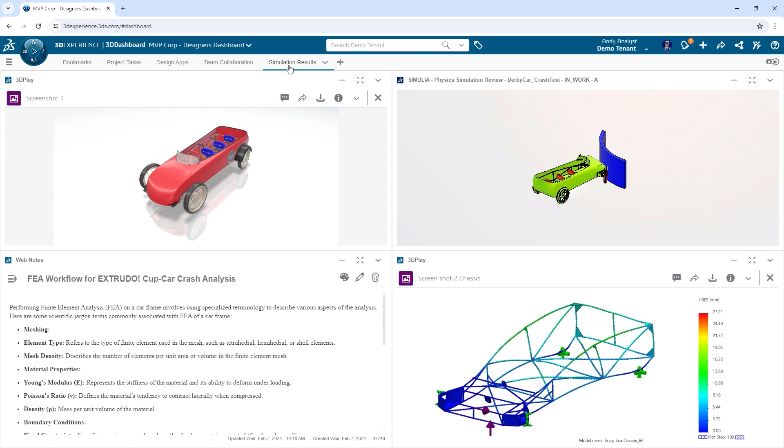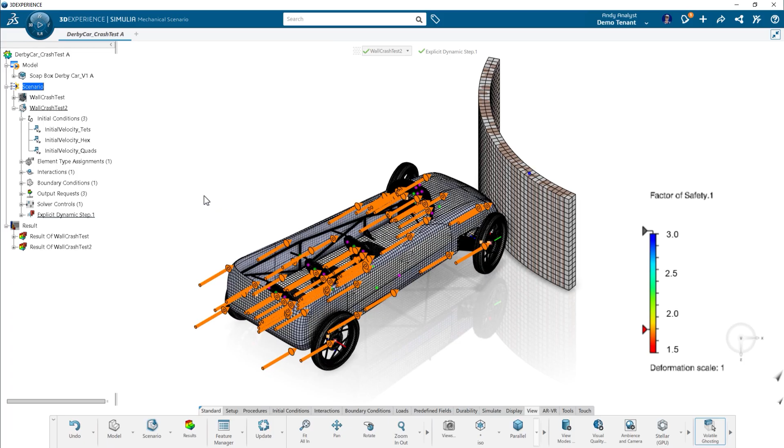Check it out, dudes. I posted all this to our dashboard. These are the explicit results from hitting the barrier while in a 90-degree turn at high speed. Pretty much a worst-case scenario, which just happens to be the exact same cornering condition that we crashed. Ouch. See, minimum factor of safety was 1.5. With Simulia's powerful explicit dynamic solver, my setup was super simple. I built the barrier, I clamped it in place, I set the car to hit at 5 meters a second. No, I do not use miles per hour because I'm a scientist. I know, this looks kind of bad, but that's just the outer shell deforming.

It's totally cosmetic. I'd even say the front end was over-designed. From what I simulated, nothing predicted the crash response. The frame and my results, they were totally solid.

Now, what did you mean were solid? Well, they were until Eric made that last-minute revision to the front end, and I didn't have time to run the studies all over again because my laptop is older than Eric's tie. I put in 6 IT requests for a new machine, and they denied them all 6 times.

But what about the cloud? Surely you got credits or tokens so you could use that solver. Oh, well, that's a great idea, and Mike was supposed to order some, but they never showed up.

Hold up. I was tasked with lightweighting the front end and making significant changes at the last minute. How could we not validate them? Now, son, hang on a second. You said significant and last minute. Now, Eric, that's never a good recipe for CAD casserole.

Not that I need Andy's validation, but let me just show you what I did. I remember it like it was yesterday. This task says to lightweight the frame. I thought heavier cars were faster, but hey, I'm not the project manager here. 38 pounds, this is gonna be easy with SOLIDWORKS 2025.

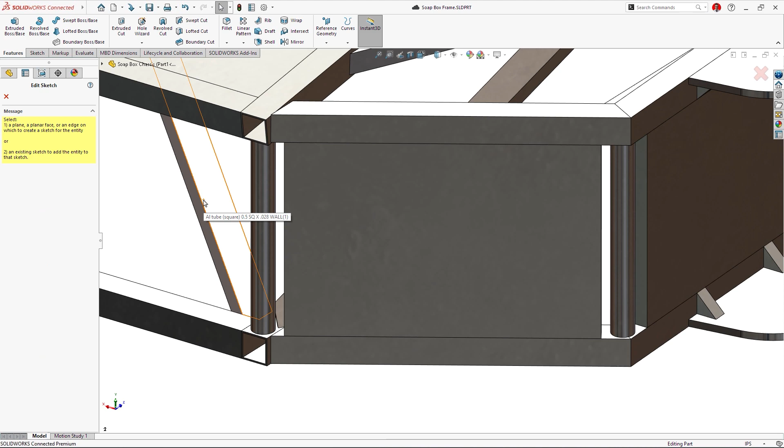I'll just drop in one of my favorite blocks on this plate, and I hate it when the sketch color matches the material. With 2025, I can change the color from the right-click menu. Now I can see it even without my glasses on. This is a good start, but I can do better.

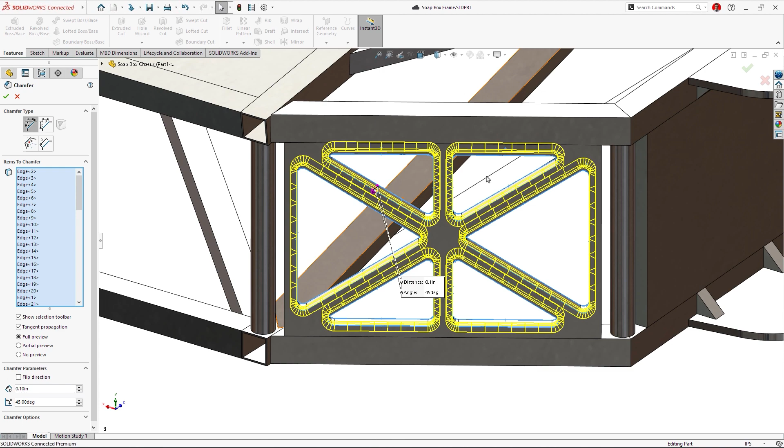In SOLIDWORKS 2025, the chamfer tool adopts the selection shortcuts from the fillet command. That was quick. Ouch, these sharp edges might injure Andy's delicate rock climbing legs. In my new version of SOLIDWORKS, I can round them off, even though they are 2 separate bodies.

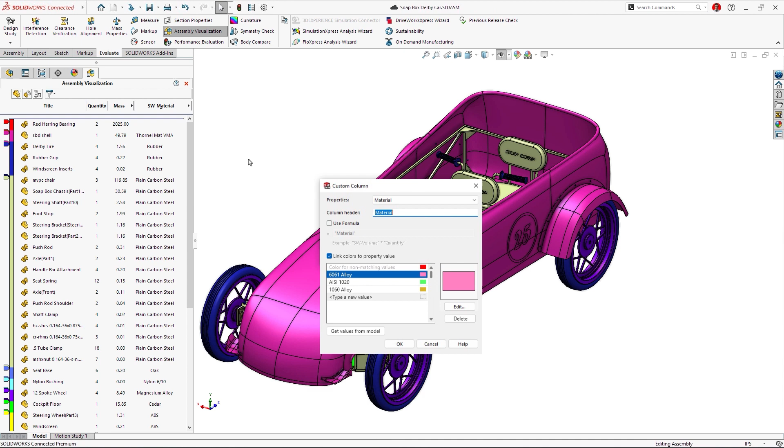Nice, bro. I'll use assembly visualization to check my work. In SOLIDWORKS 2025, I can assign specific colors, which makes it easy to see which components have no material applied. Sorting by mass, I can see that I've reduced the weight by 20%.

Now, what's that there at the top? It looks bigger than a Texas sunset. Wait an inch, pound second. This component is massive. I'll use the new roll-up feature in 2025 to isolate it. Red herring bearing. Who did this? Mike, have you been in my metadata again?

What's up, everybody? Whoa! 1 million views overnight of the Extrudo Cup fails coverage? Chad thanks you all. I saw Ben Lofton commented, what's up with the Extrudo stock price this morning? Up 13.3%? There goes all shorts.

Well, Ben, that's the power of social media, and that's the power of Chad. What's bad for MVP Corp might be good for Extrudo. Just take a look at those tickers.

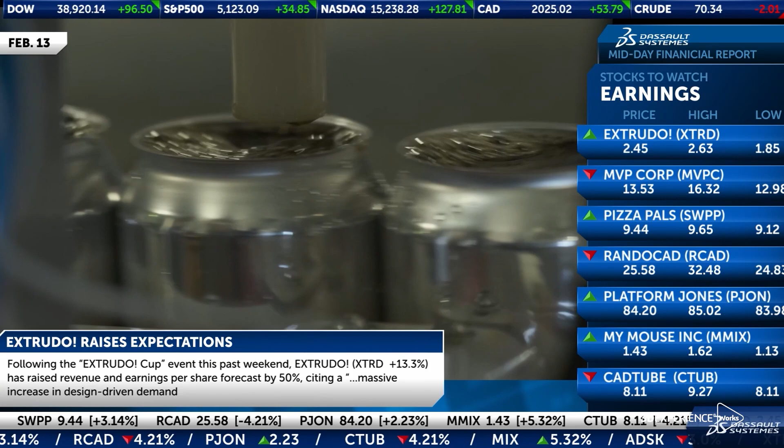Extrudo! And now, Eric, would you be able to use some of those fine SOLIDWORKS skills you're always talking about to help us investigate further? Sure, no problem, Rhaegar. That red herring bearing just doesn't make sense.

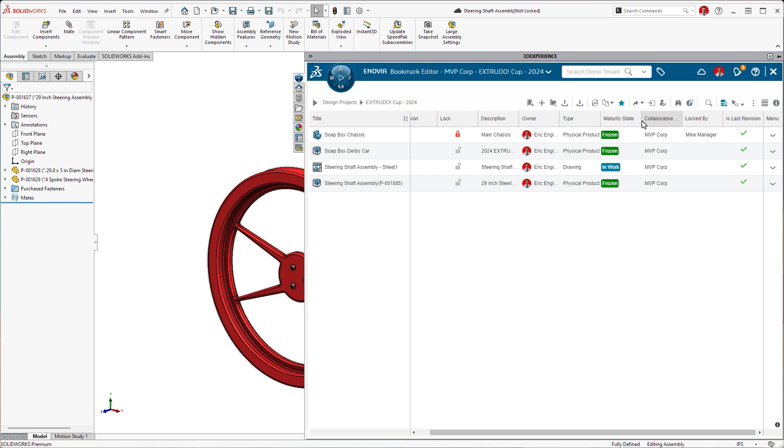Further proof that I'm being set up. And if someone has tampered with our car, it will definitely show up in the assembly drawing. Oh, dangling dimensions? Well, maybe a quick reload. SOLIDWORKS 2025 now offers the ability to reload a drawing document, just like with part and assembly files.

Okay, but that didn't solve these danglers. With 2025, this is no problem. You can highlight any dangling dimension and use the new automatic repair tool to reattach. This also works for sketches as well.

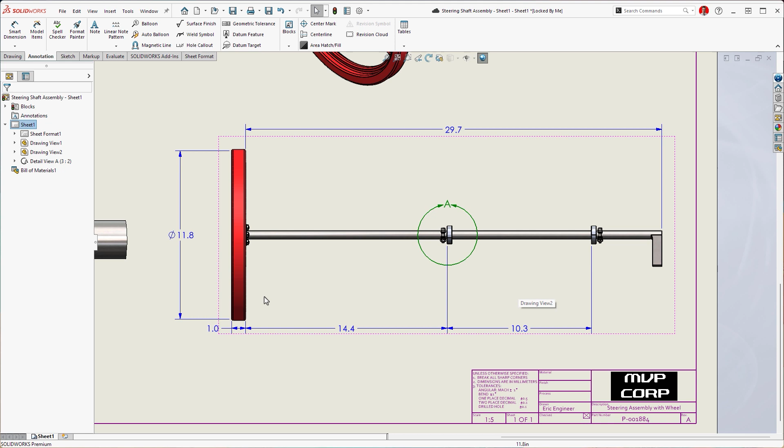Maybe this detail view will have some clues. Yes, this is interesting. A display state for a red herring bearing. There it is. Are these bearings reported in the BOM? Let me check the reference configuration. No, this is wrong. No wonder we didn't see it before.

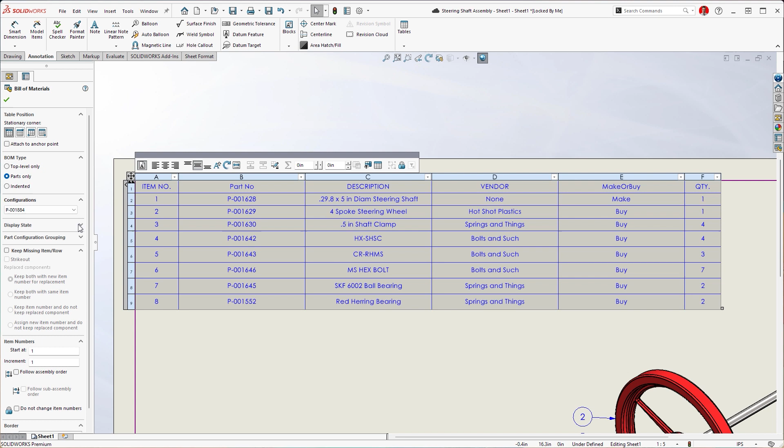Someone has definitely been tampering with this. Check this out, Bernard. In 2025, you can now filter and organize your bill of materials by configuration and display states. As great as that capability is, this drawing smells really fishy to me.

So there are design changes by Eric, lack of validation by Andy, and a drastic update to the product structure by Mike. Suspicious, quite, but do any of these constitute intentional sabotage?

Who's ready to really ramp up this lunch and learn? Extrudo just released its holiday surplus pomegranate. I've got quantities. Anything but weld mint.

Ugh. Pomegranate? I suppose. Listen, Mike, adding that red herring bearing, that's one thing. Haha, right? But modifying the frame, that could have easily caused our crash. Yeah, and I definitely didn't run sim on that.

Mike, I think now is a good time for us to take a look at your BOM. Care to defuse this? Listen, Eric, you didn't use my part numbering, nor did you fill out any of my custom properties. I definitely modified some of the metadata, but I never touched your geometry. Well, here's a chance for you to prove your innocence.

Let me take you back through what I did. Eric had submitted an update to his front-end design. We were all super busy with tasks, but the chassis was a priority, so I reviewed it first.

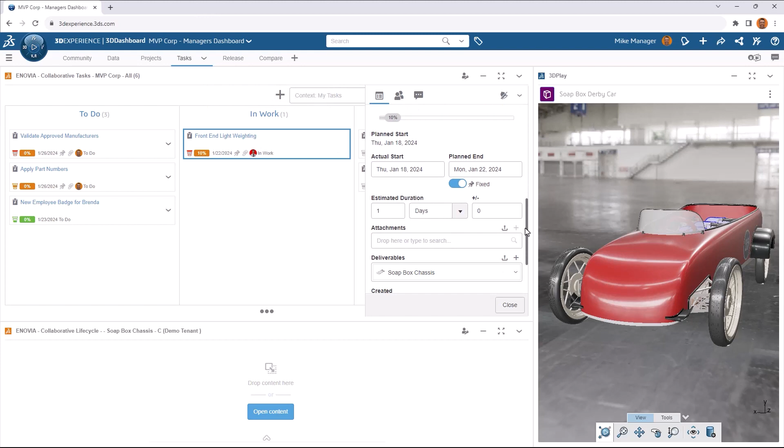Inside the task, the updated revision was attached as a deliverable. Honestly, after reviewing the chassis, it looked spot on. I even added a comment for Eric telling him my feelings. As a manager, I know his ego needs those boosts to stay motivated.

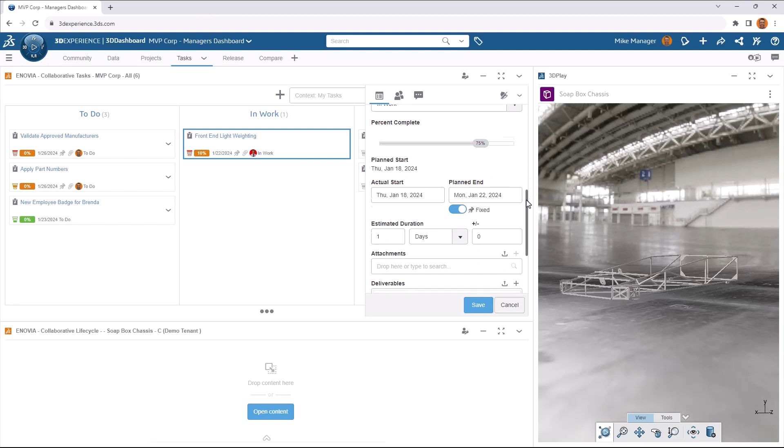I moved the task to 75%, and he still needed to provide the updated simulation results. But I did freeze the frame to make sure no further CAD changes could be made.

The two other tasks I tackled that day shouldn't have affected the structure or caused the crash. Part numbers needed to be generated for a bunch of items, and the vendor information for the wheels also had to be changed out. Since I guess we were making a switch, I thought that was a little weird. Luckily, these types of tasks don't take long with 3DEXPERIENCE.

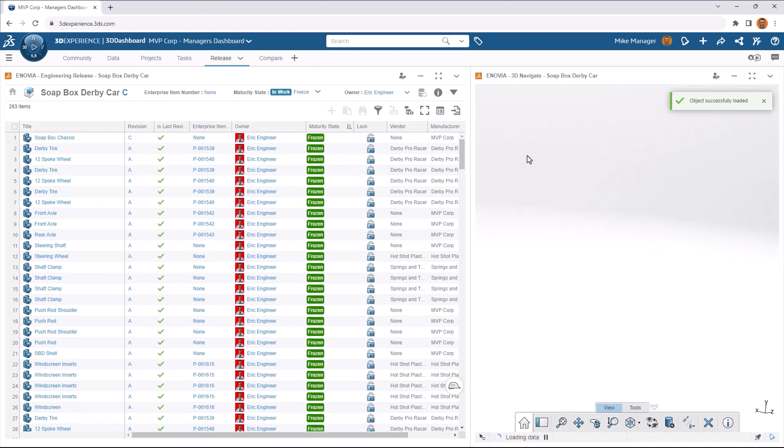With the change from our current vendor, Derby Pro Racer, I had to check what parts would be affected and verify that there wasn't anything else that our new vendor couldn't supply. The last thing we needed was a hiccup in our procurement process with these long lead items.

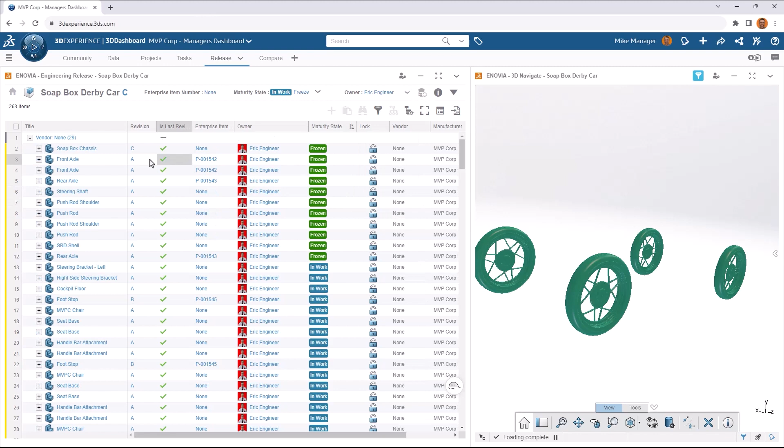The visualization showed that it was indeed just the wheel assemblies, which the new vendor, Extrudo Race Supply, would easily be able to provide. Now, we do try to track our vendor and manufacturing metadata closely, but sometimes, Eric, some of us forget. Eric. So I made the change.

Grouping the entire product structure by vendor makes it really easy to update all of the custom properties too. And just to make sure I wasn't missing anything, a quick refresh shows the changes were made.

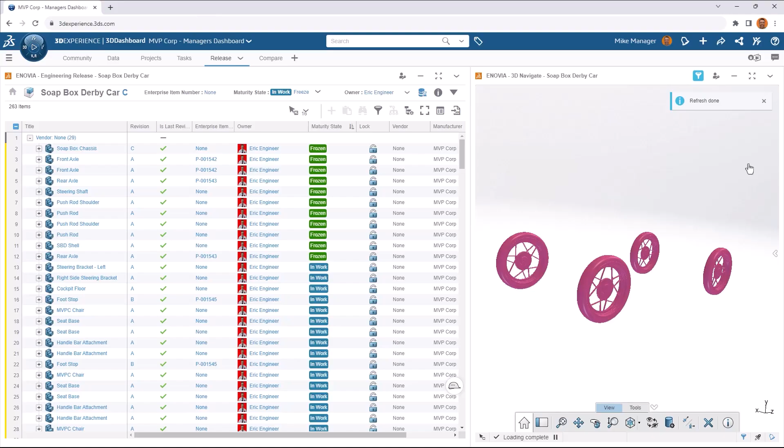Easy peasy lemon squeezy. Now my next task was to assign part numbers to all of these items. So I grouped my items with and without numbers, then just select the items with the missing part numbers. It's really easy to generate and assign all new part numbers.

I clearly remember that all of those went to a frozen state as well, at least until the final approvals could be done using our approval route. Come to think of it, there's no way a revision of the chassis can be made without going through our standard approval processes. Let me look at the revisions.

Yeah, this is disturbing. All of these branches and additional revisions and a name change? I would remember that. This all looks really fishy to me.

Where's my compare? Let's compare the revision that Eric was working on versus the released one. Uh-oh, this doesn't make any sense.

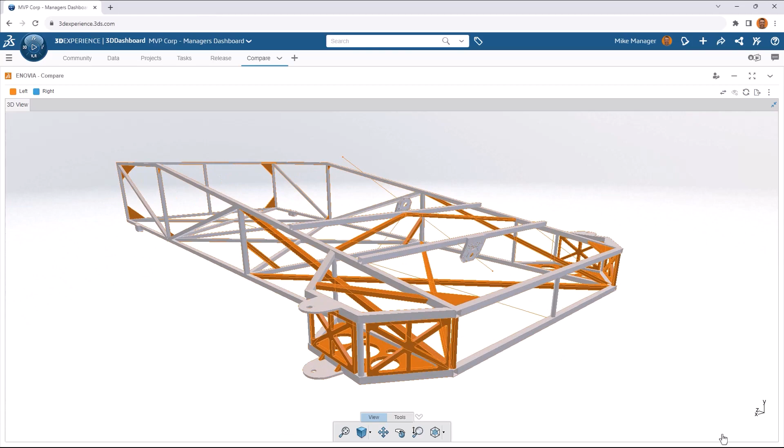It's showing me as the owner, and I can't even remember the last time I actually opened SolidWorks. No way I did this. All of the structural support in the front end has been completely undermined.

Well, then, you wouldn't be opposed to showing us how you would model it then, would you? I just so happen to have a branch with my superior design right here.

Now, I prefer to use structure systems instead of weldments. It's easier to use and update. Instead of 3D sketches, I use simple solid and surface geometry, or even planes.

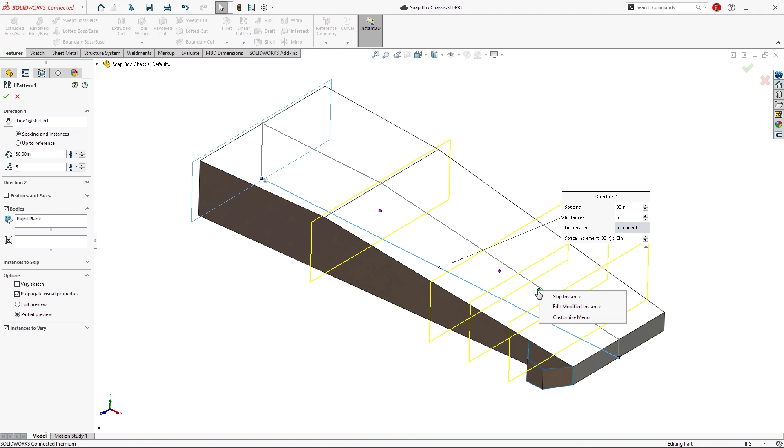You guys are all going to love this. Setting up these planes was easy now that you can pattern planes and axes in 2025. Even better, you can now specify instances to vary as an offset from another instance rather than having to calculate the distance from the seed.

That makes a lot more sense in this context. And look at how clean this feature tree is. I started with my base geometry and used that to create the frame. I added some gussets for strength and a brand new front-end design. There's still some work left to do, but I think this is a solid start.

Now, Mike, I know how much you love your properties. It seems obvious to me that these members are going to be cut on the bandsaw, but I'll add a property just for you. In SOLIDWORKS 2025, I really don't mind since copying cut list properties to all items is now possible. This saves a ton of time.

These sheet metal components aren't going to be cut on the bandsaw though, so let's change that for these 4 items with a quick overwrite.

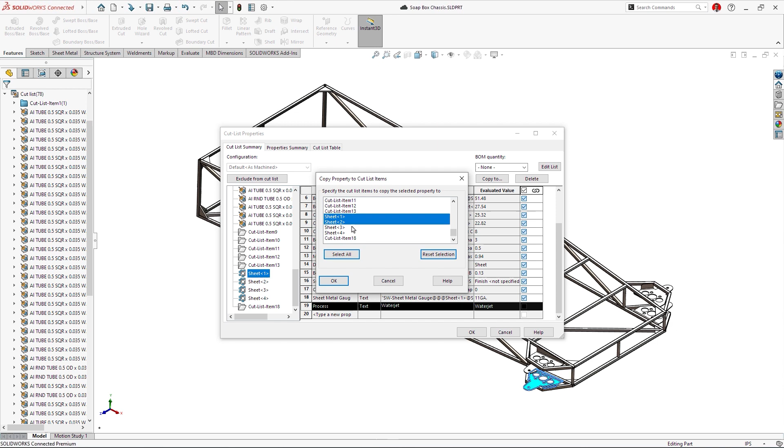You got to give me mad props for that one, boss.

This sheet metal part is almost complete, but I've been struggling to communicate my bend areas to the shop. Not anymore. With SOLIDWORKS 2025, I can add bend notches to the flat pattern, so it's easy for them to line up the part in the press brake.

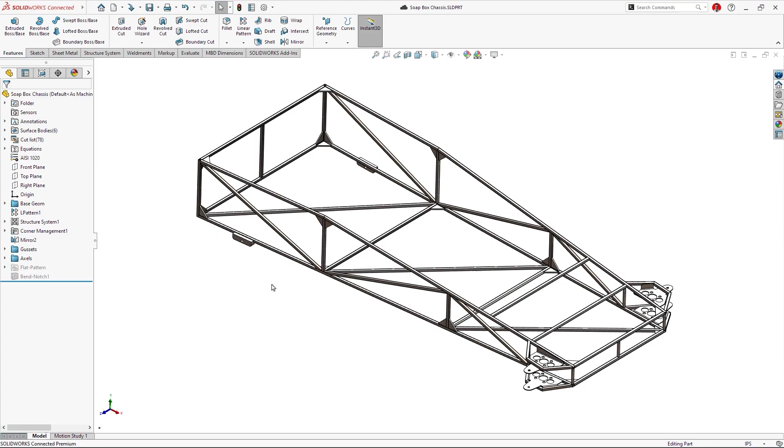And don't worry, Andy, I've got something for you too, and it just so happens to be my favorite feature in 2025 so far: the ability to configure the structure's profiles. This makes it a snap to create different variants for your FEA analysis. You won't need to rappel down from Analysis Mountain to bother us lowly designers anymore.

That is quite the speedy design work, Eric, but it's hard to tell just by looking if your new design is better or worse. Reynard, I got this.

Move. Dude, there's no way that your design would have survived, and I can prove it. Let's see if it can withstand what we throw at it using SOLIDWORKS simulation.

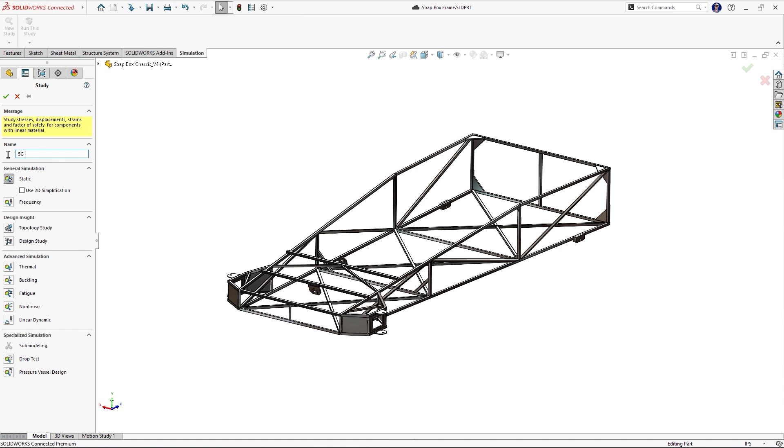I'll make this simple so even you can understand it. Notice how the structure system geometry automatically becomes a jointed beam model. First, I'll add some fixtures where the wheels and suspension meet the frame.

And now for the loading. These are high performance machines, so they need to withstand 5 Gs of side loading when cornering. Now let's run this linear static analysis.

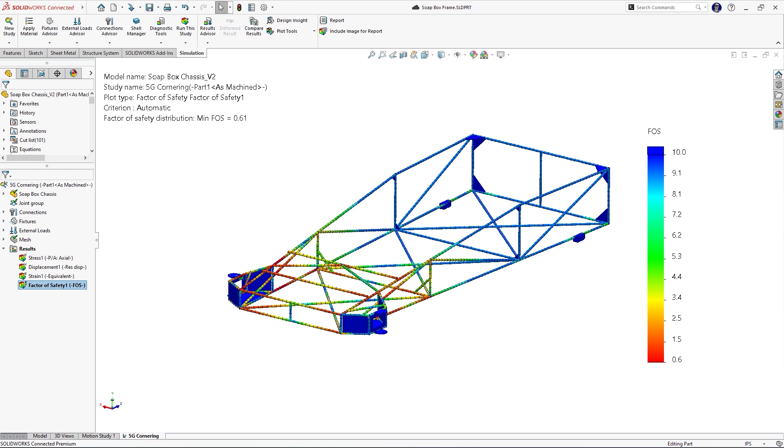No way! That's even worse than I thought. Red is bad, Eric. Minimum factor of safety is 0.6. That's a total failure, bro.

You're still not convinced, huh? Okay, cool. Well, let's see how this thing responds to harmonic loading. To save time, I'll copy my study to a dynamic analysis. All my fixtures and connections go along for the ride.

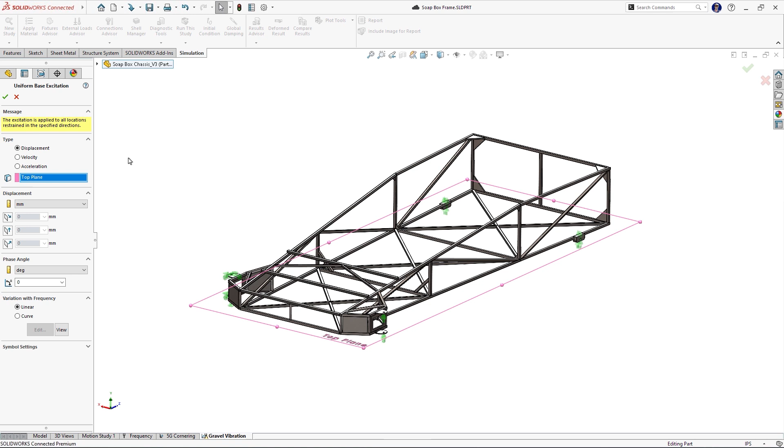Now to add a base excitation. Rolling over gravel at high speed creates vibrations typically between 50 and 100 hertz. And now, in Simulation 2025, I can specify those areas on the response spectrum. That means additional harmonic mode shapes right where I need them.

Oh, well, look at that! It's Galloping Gertie! With that type of frame deflection, you'd lose all steering control.

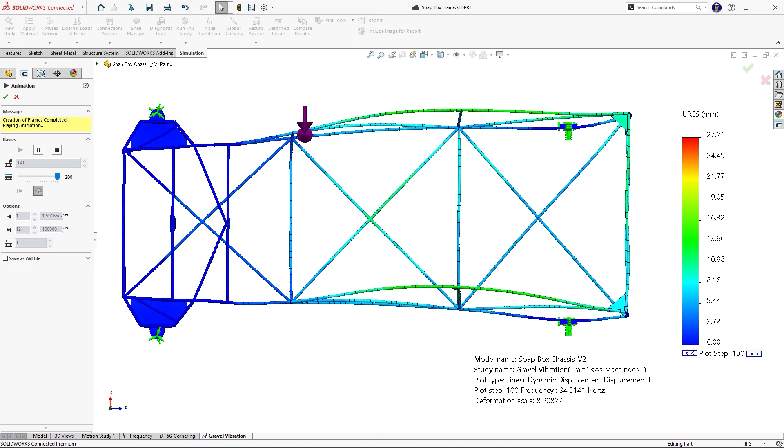That's interesting, since that's exactly why we crashed. But we were totally thrown from this car, bro. From the harmonic response, we get a pretty good idea about what would happen to us if we were riding in it. All of the chairs are connected to the floor with springs.

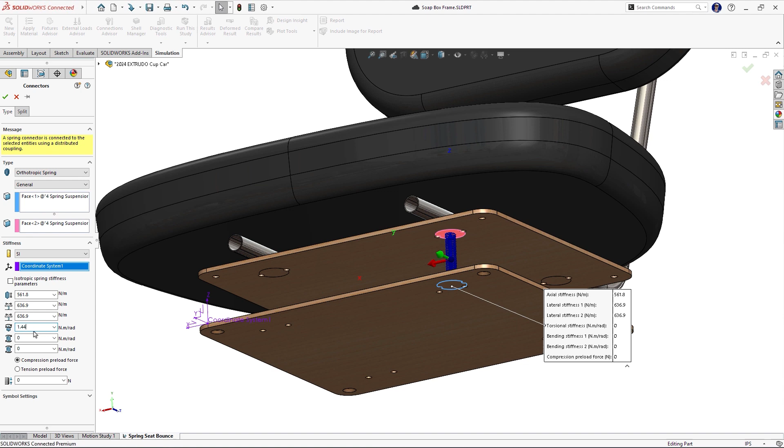To accurately represent them, I'll use the new Abaqus-powered orthotropic spring connector. With Simulation 2025, not only can I control the axial stiffness, but also the directions of lateral, torsional, and bending stiffnesses as well. All right, and run.

Wow! Your new frame turned our chairs into ejector seats, bro!

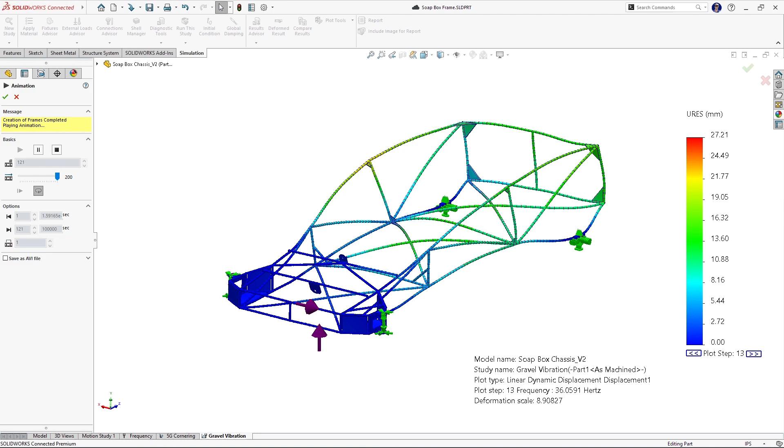And don't think I missed this result. The fundamental frequency, it corresponds exactly to my cornering speeds.

What's going on here, Eric? Have you been spying on me at the track too? The frequency has to be a coincidence. I can't imagine that anyone is down at the go-kart track meticulously clocking each of Andy's lap times.

Well, I wouldn't be surprised if I did have a fan club, but regardless, whoever changed the frame, they're the ones responsible for sabotaging us and breaking my belay arm. Your arm is fine. And almost breaking my belay arm. It still hurts. Okay, let's circle back.

Whoever made the change to the primary structure assembly and the frame, well, it's gotta be one of us. That change, as you call it, that's not at all what my feature tree looked like. It couldn't have been me.

Yes, but it is possible that you modeled it in such an amateur fashion so as to throw someone off the trail. Well, you know, it definitely wasn't me. I'm much more of a mesh and run what I get kind of dude.

There's only 2 of us who have permissions to approve the final route stage to get it released. Maybe we're overthinking this. Someone, not saying who, got ambitious in his lightweighting and didn't rename his feature tree. Someone else released a new revision before, who could it be, could resolve the backlog of geometry changes.

You know, Reynard, I think these are good lessons learned for the team as they get started on next year's car.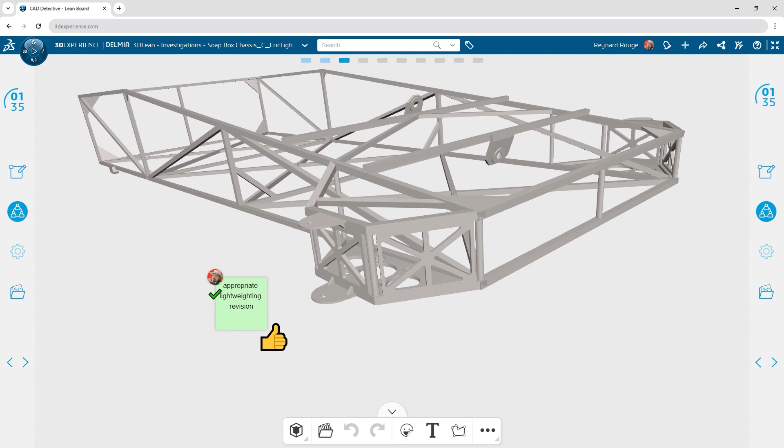Eric, we all agree your initial lightweighting into the front end is fine work. Did you go too far and undermine the structural integrity in another revision? I will say Eric certainly appears surprised by the crash. In fact, from the outside, the final car doesn't look sabotaged at all. Perhaps no one knew what he was stepping into on race day.

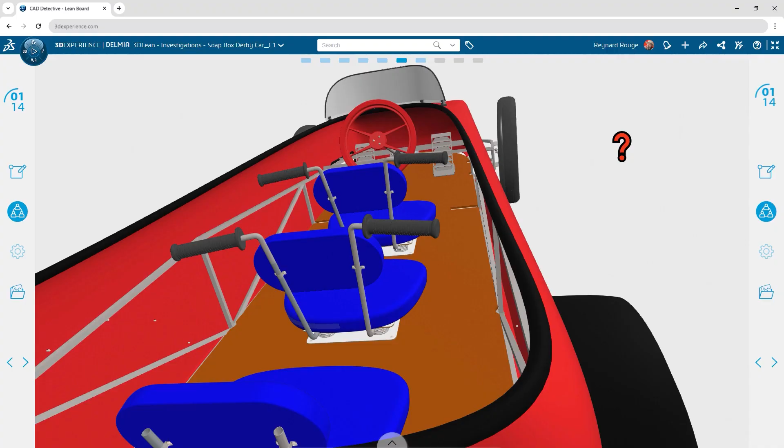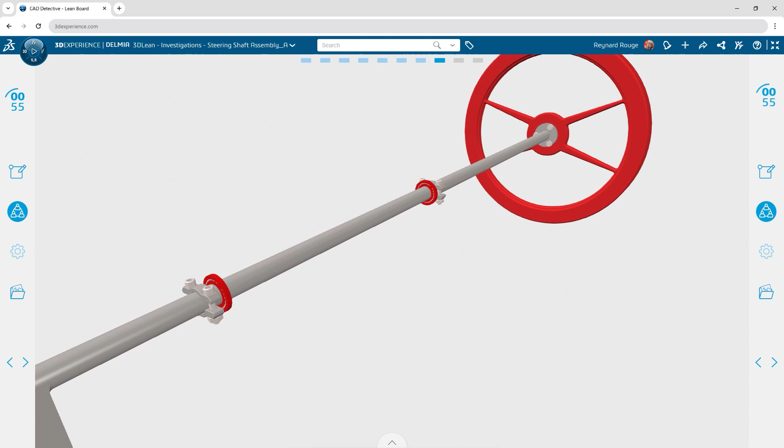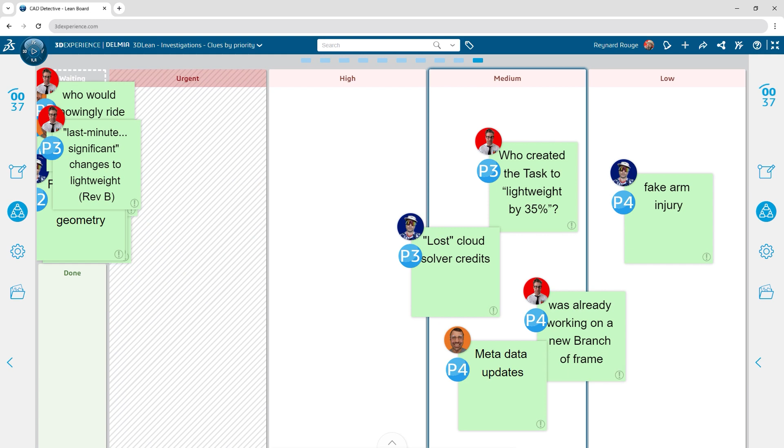The culprit knew their way around a collaborative space, of that I am certain. Trying to outfox Reynard behind a thicket of branches and merges. Already we have more problems here than a hunting dog has fleas, but let's just cut to the chase. Who changed the structure, and who approved the release?

And what are we to make of this Extrudo stuff? This goes way beyond the crash at the Cup. And there's always these influencer channels. Y'all been following Chad? He's speculating that MVP, Extrudo, and the masked billionaire are all tied up in this together. MB, one and the same as my employer. If only we had more time.

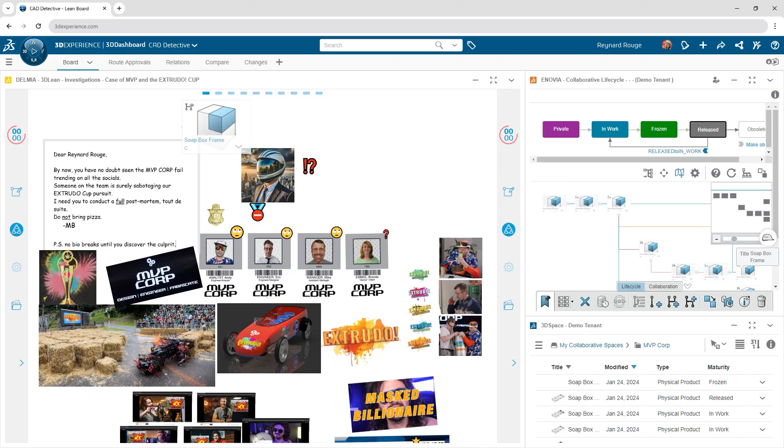If only we had more time. Alas, let's just bring this home and answer the most immediate question with the simple drag and drop of the product structure here to the place, and we're gonna... Excuse me, sorry Reynard, but this just arrived.

It's virtually cold, carbonated, and still in beta. They gave me an entire keg of the new Sweet and Sour. Sweet! Brenda's got the Extrudo R&D hookup. Does anyone know how to tap one of these? I'm the beta tester around here.

Obviously we all know who the culprit is here, but for the sake of alignment, could you fill us all in, please? Well, recall if you will, the masked billionaire's instructions were everyone expected to present. Now, who here has yet to show his or her work?

I don't think so, Brenda. Everything there is Extrudo. How about that Sweet and Sour, huh? Let's get your taste buds twisted along a path, right? Brenda, what is Eric talking about?

All right, fine, you got me. I'm a huge Extrudo fangirl, okay? Ever since my first sip 5 years ago, I have been hooked. Plus, it's an amazing company. Now, according to Wikipedia, it's a terrible company on the verge of bankruptcy ever since inception, and Wall Street has called it the worst niche product since the reversible toilet.

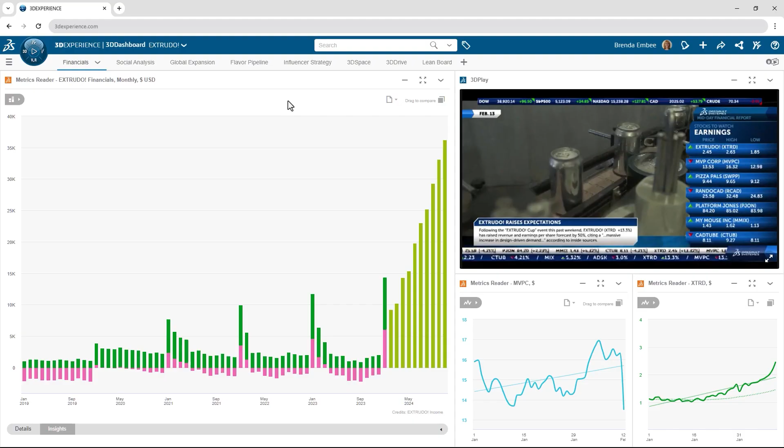Look at our top line revenue. During cup season every year, we actually make an operating income. With this year's buzz, we're looking at triple-digit growth, baby.

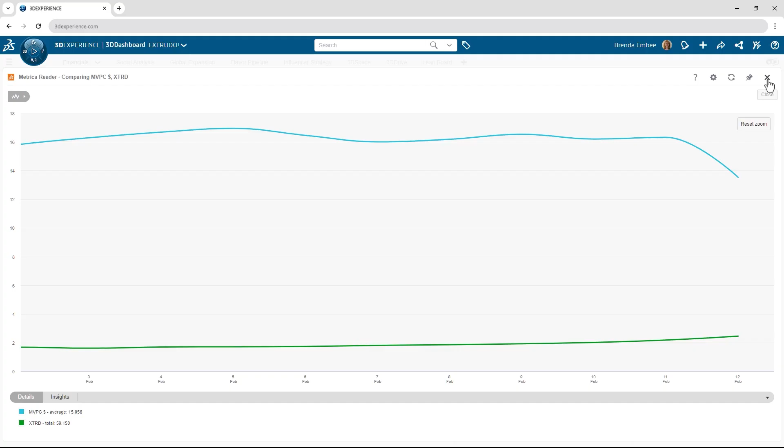Have you seen the markets? Extrudo's up 13%. You MVP guys are tough. You'll survive to design another day. There are tailwinds helping us here.

Semi-sophisticated consumers, like you three, are tired of big beverage. Global sentiment on caffeine is at an all-time positive. And regions like Northern Europe are especially peppy right now.

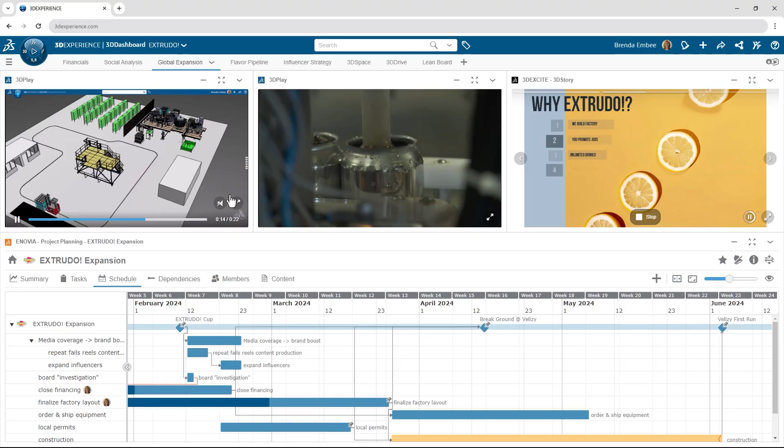In April, we're breaking ground in Velizy. We'll be serving every designer around the globe and around the clock. With my factory layout already complete, there might even be enough room for quality control this time.

But guys, seriously, this investigation is blocking my critical path to expansion, and I do hate breaking a dependency.

How about the new flavors in our pipeline? Rainbow Crash - with flavor like this, we must be living in a simulation. Fillet Fruit Punch, a well-rounded and perfect finish to everything. Lemon Live, tart yet sweet. Sub Delight, sculpted around virtual oranges.

And what's the most critical component of a plan? Social media strategy. The cup was always the focal point for this. We would get massive coverage of the brightest minds competing in a well-hydrated engineering nirvana.

But that's not how the real world works, is it? No, it was the video of the fails that went viral each year. Luckily, this did miracles for our brand awareness. And you three were always crowd favorites.

We've revamped our influencer program and signed channels like Crazy Cad Kevin, Sheet Metal Sharon. If you aren't following them, your kids probably are. And this year, we break out of the Danny Dozen Cans demographic. Soon, we'll be on tap in every client boardroom and reseller office across the globe.

My only hope for triple-digit growth was to get more attention on the brand. Unfortunately for you, that meant more crashes at the cup.

How did an intern do all that? I didn't even think they got paid. I think it's been in front of us all along.

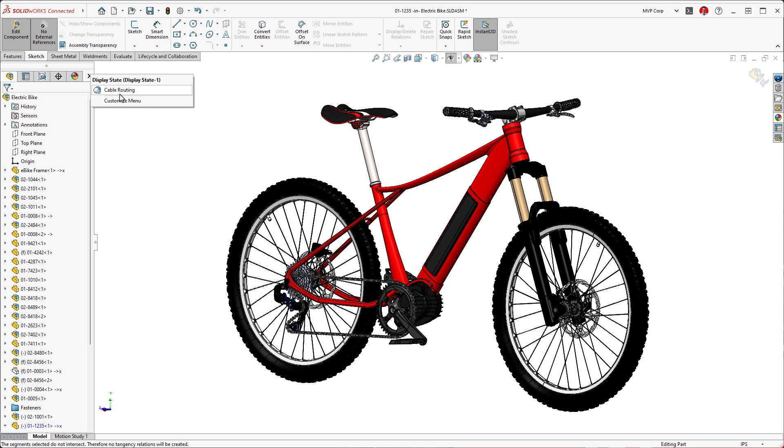In SOLIDWORKS 2025, there have been some great enhancements added to the sketcher. This e-bike assembly needs to have an accurate representation of the hydraulic brake lines. In the past, starting with a 2D sketch would have left us with an inaccurate path and incomplete connections.

Soon, users can convert 2D sketches to 3D with a simple click. Modifying this path is even easier than before. The sketch triad can now be activated on spline points with a double click. This really streamlines positioning complex 3D splines.

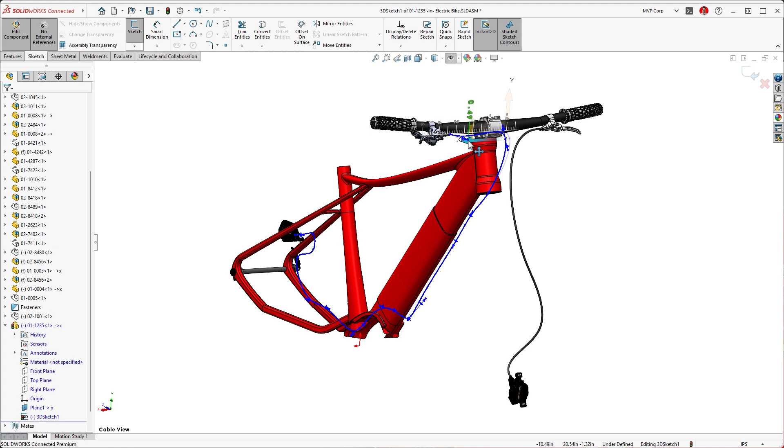Tab and slot design means more simplicity and precision for the shop. Not only is the UI simplified in 2025, but there's a new spacing option that will align your slots to the center of the edge, allowing you to build your tab and slot system from the inside out.

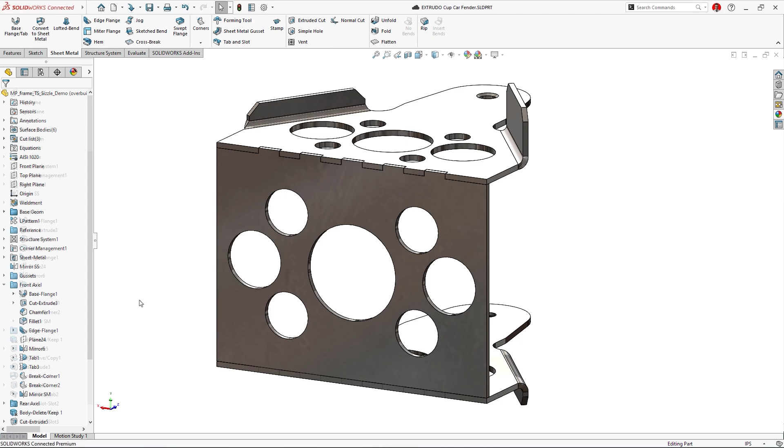SOLIDWORKS has long offered multiple options for working with large assemblies. One that I use the most is Large Design Review, or LDR. In SOLIDWORKS 2025, more capabilities are available when using LDR. For example, breadcrumb navigation, which makes it super fast to pick the right component.

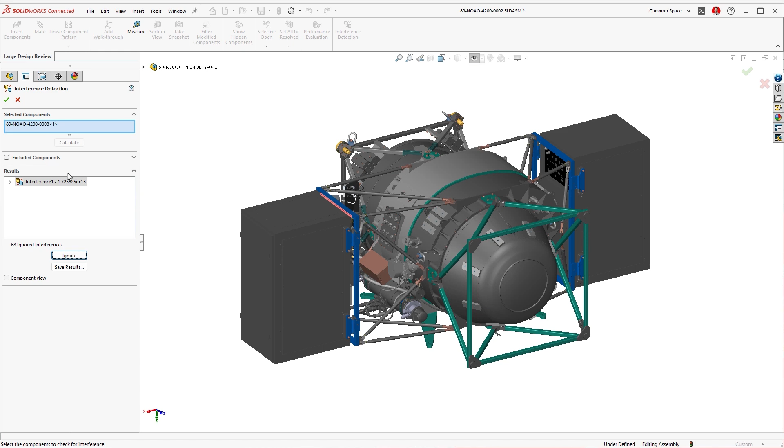2025 expands LDR further. How about we run an interference detection to scan for overlaps? I've pre-selected a subassembly to run the check. Sure enough, there is an issue with the electrical cabinet and its structure. I'll have to investigate this a bit more.

Now, in 2025, LDR also supports the use of component preview. This is a side window that gives you a second view to help inspect and modify your design. Here, we can see the issue is with a misaligned hinge bracket.

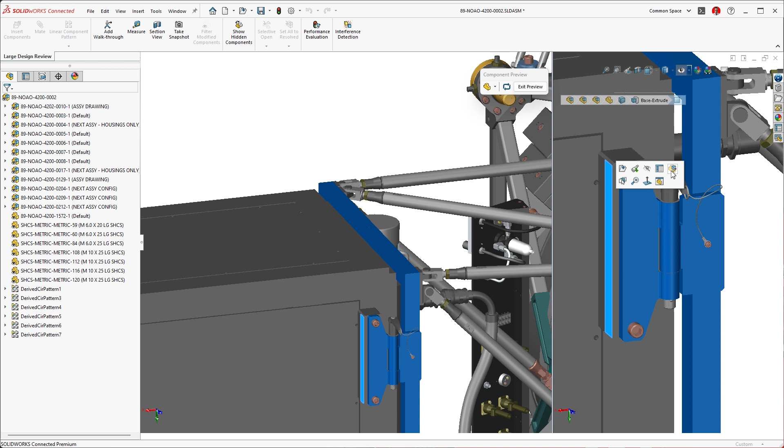No problem for SOLIDWORKS 2025, since in-context edits are available when working in LDR. Editing this part in its underlying sketch is all that's needed to shift the geometry into place. This looks good. With the changes made, a quick rerun of the interference detection shows the issue has been resolved.

If you aren't using LDR almost all the time, you will be with SOLIDWORKS 2025.

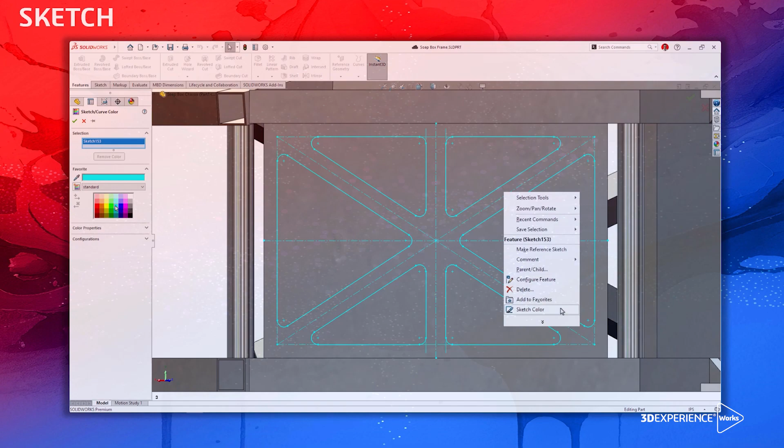Now, let's review some of the great enhancements we saw this week in Dallas. Keep in mind, the development team is hard at work on many more coming throughout this year with each service pack release. I really can't wait for the right mouse menu so I can easily modify my sketch colors.

Fillets will support multi-body selections. Chamfer selections will include the selection helper. Assembly visualization introduces a roll to here shortcut and adds support for additional property colors. Drawing files will be reloaded on the fly, and dangling dimensions in drawings and sketches can now be automatically repaired.

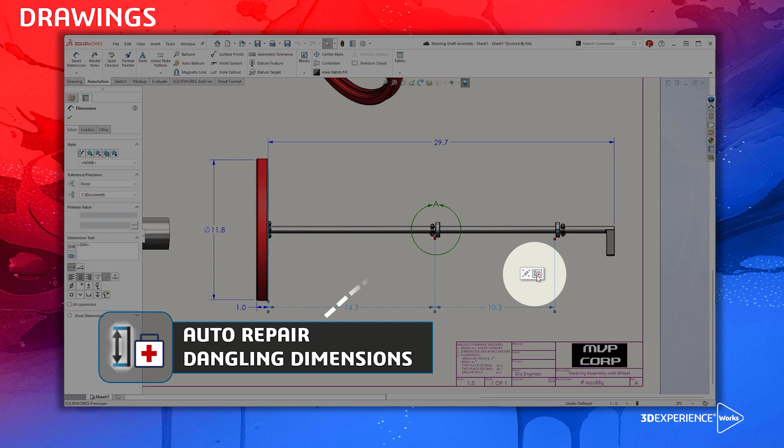Bills of materials will offer the option to be filtered by display state. Linear patterns will support planes and axes. Structure system profiles will be configurable. Properties will be more easily copied through cut lists. Sheet metal will introduce bend notches.

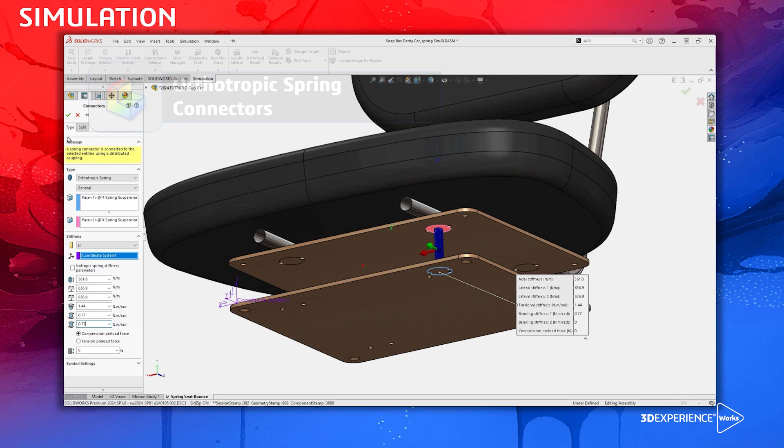Simulation Premium will allow users to target specific harmonics in dynamic studies, and adds a new orthotropic spring connection.

Finally, in case you haven't been taking notes, let's recap some of the 3D Experience Works roles the team used this week. I've really started to find a hankering for Boolean Blast, and through the demo, I primarily used 3D Experience SolidWorks and Collaborative Business Innovator to keep everything organized. Exactly what you have with SolidWorks and cloud services.

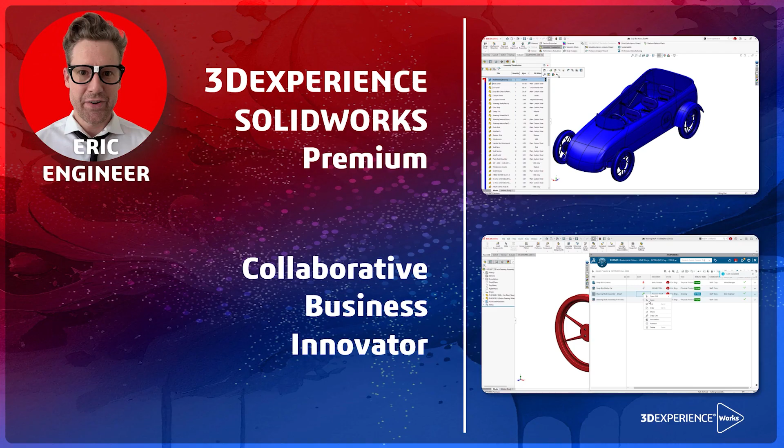Mike, the manager, has fallen in love with Pomegranate and keeps an extra jug in frozen state in his desk drawer. Throughout his work week, he relies on Product Release Engineer and Collaborative Industry Innovator.

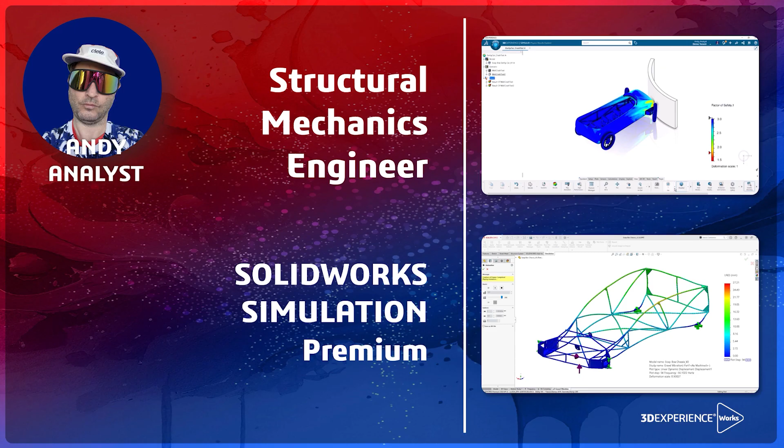Andy's rock climbing pack is full of Rainbow Crash that he stole from the Extrudo R&D lab. To get his job done, he relies on Structural Mechanics Engineer when the going gets tough, and of course, SolidWorks Simulation Premium. Reynard Rouge keeps his thirst quenched with a cold, sweet feature tea, fitting for a Southerner.

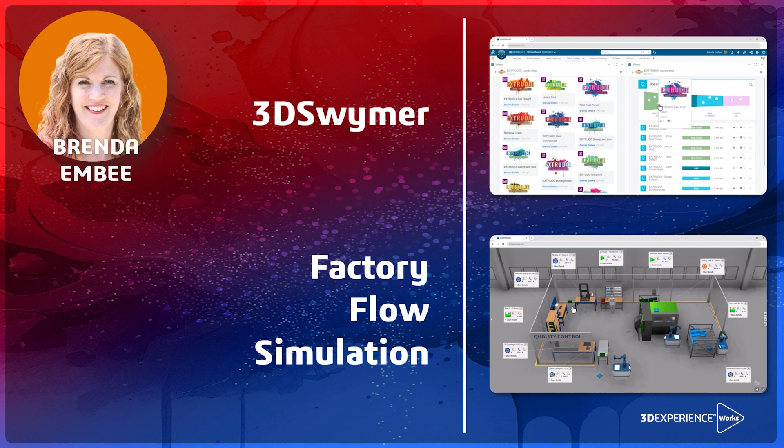Throughout the week, he kept track of all of these clues with Lean Team Player. Brenda loves the kick of extra strength over constrained. To keep her creativity flowing, she leverages 3DSwymer. On the production side, factory flow simulation is helping her take over the world one Extrudo can at a time. And of course, without Project Planner and Social Business Analyst, Brenda would have struggled to keep her scheme on track.

All right, finally, remember team, let's keep our SolidWorks updated throughout the year so we can all use the new capabilities together. Whew, these demos are making me thirsty.

I think maybe you should stick to water. Great job. Well done, everybody.

Miss Tracy, we're all going to go to one of those escape rooms. Would you care to join us? I got a coupon. Oh, maybe in just a minute. I got to do something first. Oh, I see. Okay. That'd be kind of fun, actually.